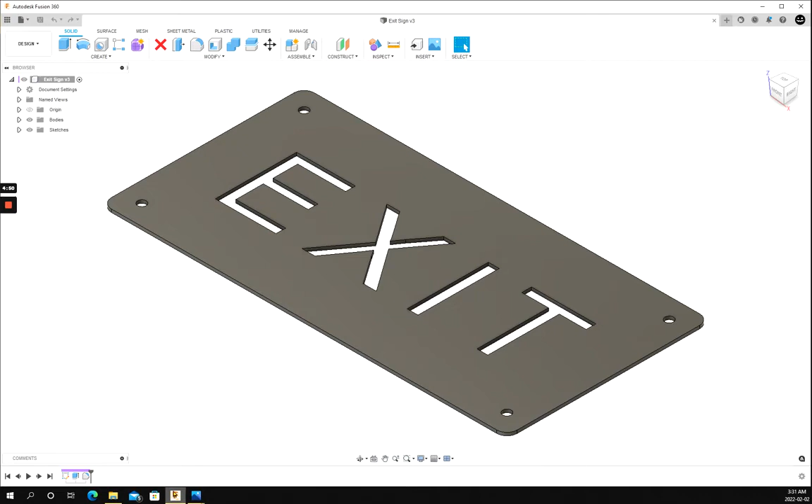Our objective for video 4, part 2 of 2, will be to complete the CAM for the exit sign using Fusion 360. We'll start where we left off and move from the design workspace to the manufacturing workspace. In the manufacturing workspace, we'll make sure we're in the fabrication tab and open a new setup in this folder.

In the setup menu, we'll select our machine, the Langmuir Crossfire Pro. Our setup is a cutting operation, and we'll move our stock box point to the bottom left-hand corner. This will ultimately become our origin in Fire Control. Our model is the body we created of the exit sign.

In the stock tab, we'll add a 1/4 inch of extra material around the outer shape of the body, and it gives us the ultimate dimensions of the material we'll need to create this piece here. Keep in mind that you'll need room to put your ground clamp on. Here we can enter a file name. This file name will become our NC file name.

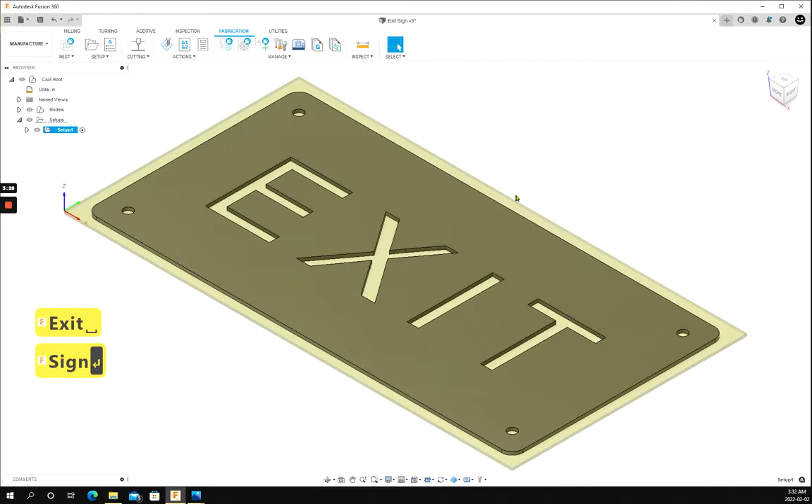We'll select the Cutting 2D Profile menu, and we'll select a tool appropriate for cutting 14 gauge mild steel. We're cutting all the way through. That's a default setting. And these are the feed rates associated with the tool we selected, and we can change them here if we'd like. Under Geometry, we'll select the face we want to cut. We'll move to the Passes tab.

Sideways compensation typically will be left, and it'll automatically do clockwise or counterclockwise depending on if it's an interior or an exterior cut. We'll also select Smoothing. This can reduce your G-code by a considerable amount and make the cutting operation a lot smoother. The feed rate optimization I'll start using at about 3/16 or above for material.

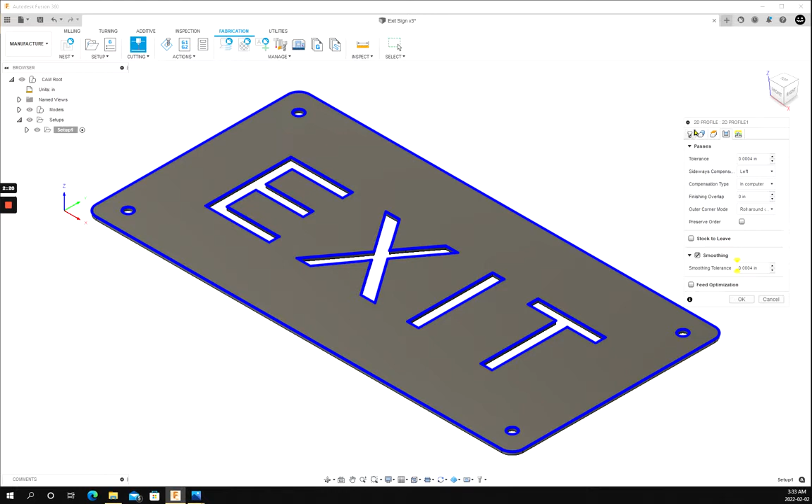In the linking tab is our lead in, lead out, and our lead in radii. So we'll change a few of those settings. Our pierce clearance defaults to our kerf width, and that can be changed if we'd like.

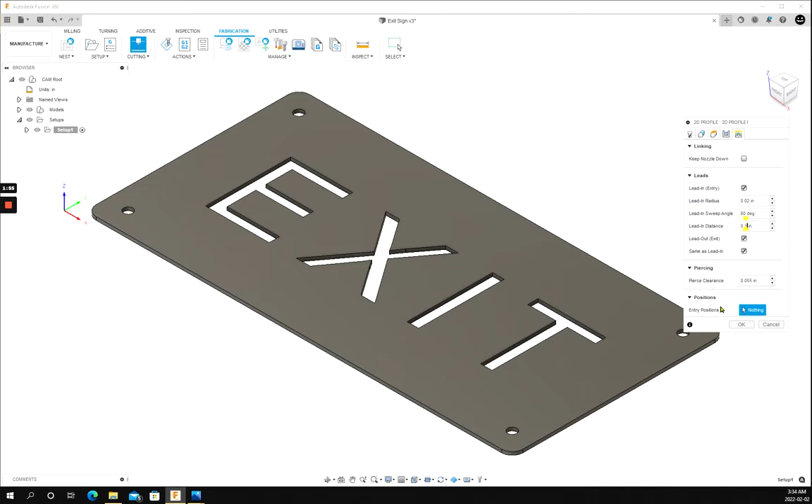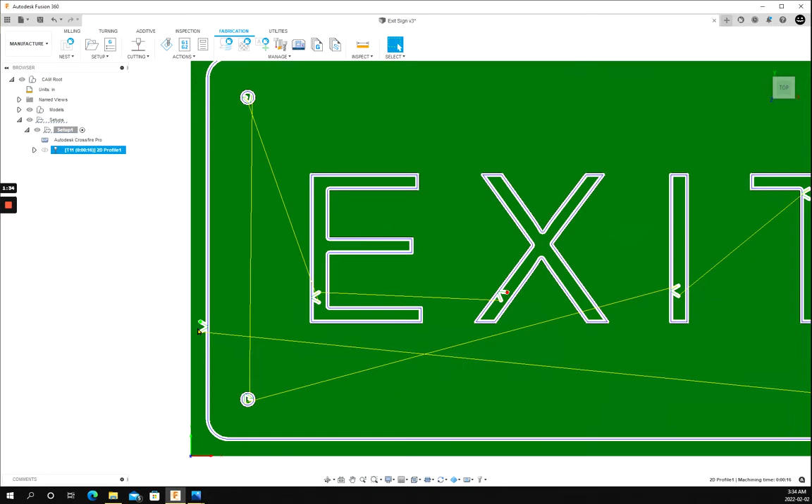And now down here at positions, these are entry positions. So if we chose to, we could select a few different entry positions for our lead in and lead out of that shape. And Fusion 360, when it's generating a toolpath, will do its best to put the lead in and lead out in those positions you've chosen. So it works from the interior to the exterior. And we will go in and take a look at a simulation of this cut. And that looks like it's going to cut good for us.

We're selecting Setup 1. We'll move to the G-code menu. We're making sure that we use the Langmuir post-processor. Our file name is automatically entered from back where we entered it in the Setup menu. This is our output folder. And a lot of people sometimes lose this, so if you hit this button with the eye, it'll automatically open that folder for you.

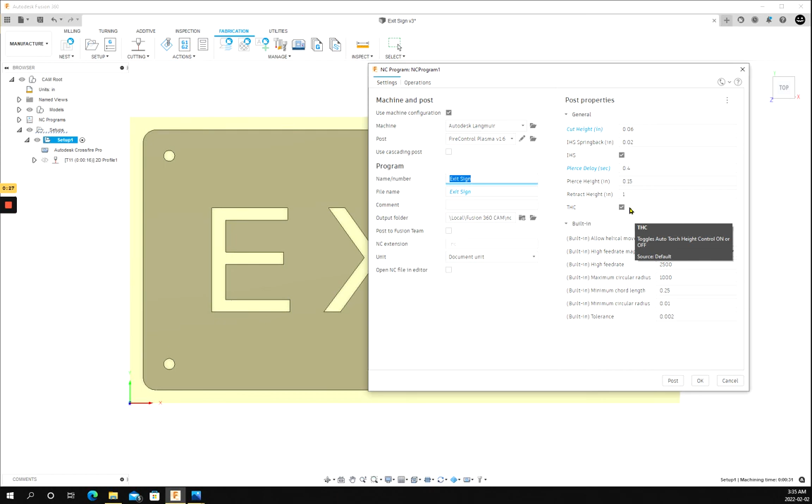Some of our other important properties here: the cut height, pierce delay, pierce height, whether or not you're using your torch height control. So we'll post this file, and it shows us in the bottom right-hand corner that it has successfully posted, and we have the option to view it in a code reader. And that's it for the CAM development. We are done.